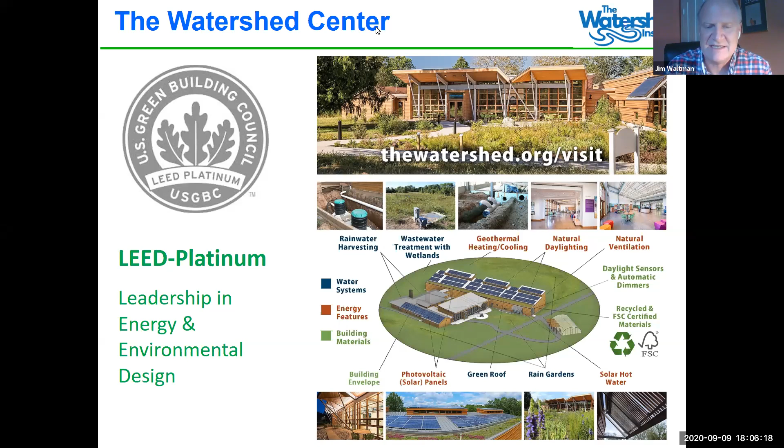It's also a great teaching platform for us as we work with municipalities and the private sector to improve stormwater management. We have a number of programs throughout the course of the year.

I just want to queue up a couple that are a little bit in the future. On February 4th and 5th, we'll be conducting our second annual Green Infrastructure Training and Certification program. This is designed for landscape professionals and public works staff, and it's a collaboration with a great group called the Chesapeake Bay Landscape Professionals. This is a program that just recently reached out to us in interest of expanding beyond their scope, which obviously has been the Chesapeake Bay.

And then later that month in February, we'll be providing a green infrastructure maintenance training program specifically for public works staff, and we'd love to have your town staff join us for that.

Of course, our staff would welcome other opportunities to come and present to your municipalities if you believe that would be of help. We're located near Pennington, Hopewell Township and Mercer County, and we tend to focus in that part of the state. ANJEC is a great partner that does work across the state of New Jersey, and I'm sure they would welcome opportunities to come speak to your municipal bodies as well.

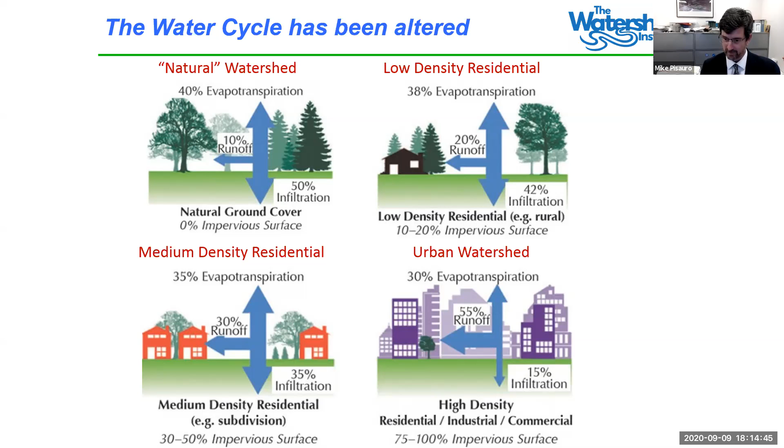Today, DEP just released with Rutgers a fairly regular land use change update, which indicated a little over 30% of New Jersey has urbanized, has urban cover, meaning that lower left-hand side scenario. So with 30% impervious surface, which varies depending on where you are in New Jersey, as a whole, 30% of water that hits the ground from rain events runs off, versus 10% under natural conditions. And again, that has some real world implications.

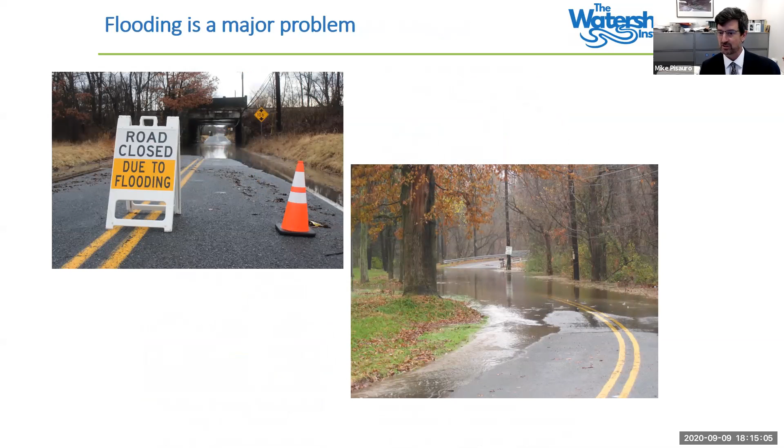Here are some of those real-world implications. These are two roads that I take sometimes to work. As Jim mentioned, we've all experienced flooding and impacts on our way to work. Here's two of them that I've personally had issues with, and here's a few others. These aren't the Irenes and Katrinas and Sandys of the world. These are not extreme weather events, just everyday rain events.

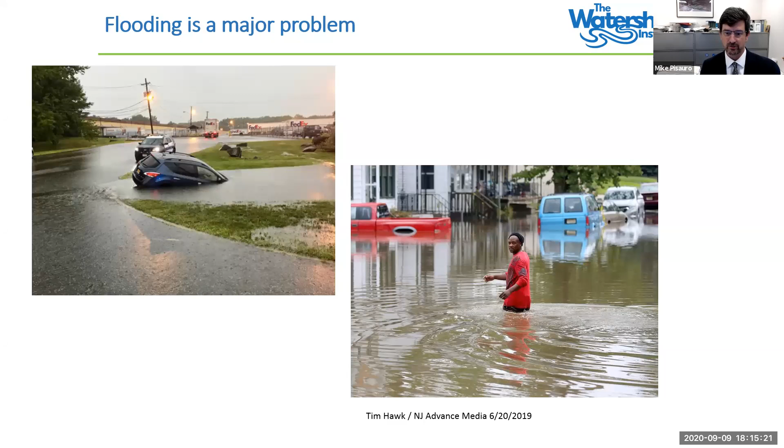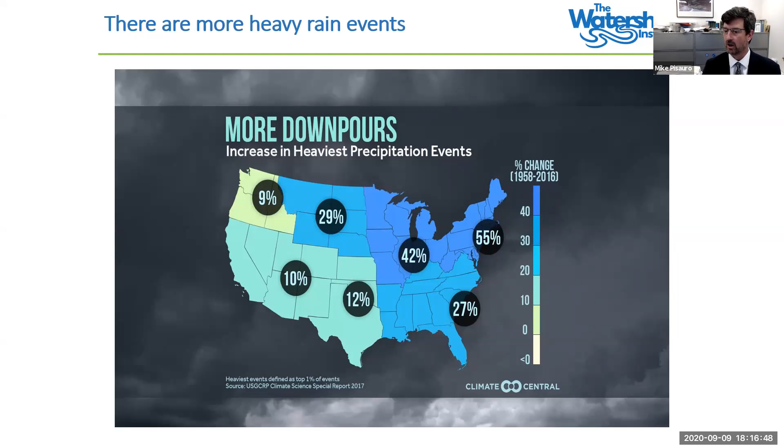At the same time as we're having more rain, the patterns of that rainfall have changed. In the Northeast, we are having more heavy precipitation events versus a long-term gentle rain that I remember as a child fondly, but more of it's coming down in a more intense period of time, which means our land cover and our systems have less opportunity to address it.

Not only are we having to deal with more rain, more volume, but that has real world implications for water quality. Every 2 years, the state of New Jersey comes out with a water quality report, required by federal law. This is the most recent one from 2016.

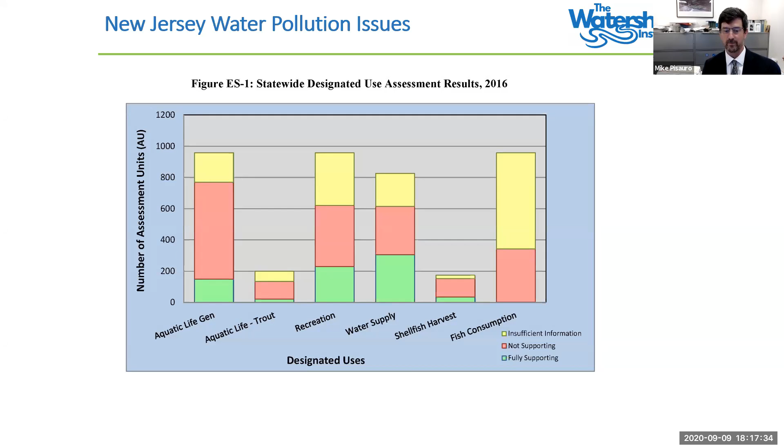Red is not good, and that red means we have water that is not meeting standards, that is not healthy enough for aquatic life, not healthy enough for recreation, not healthy enough for water supply. And this is 2016, and in case people think I've cherry-picked a report...

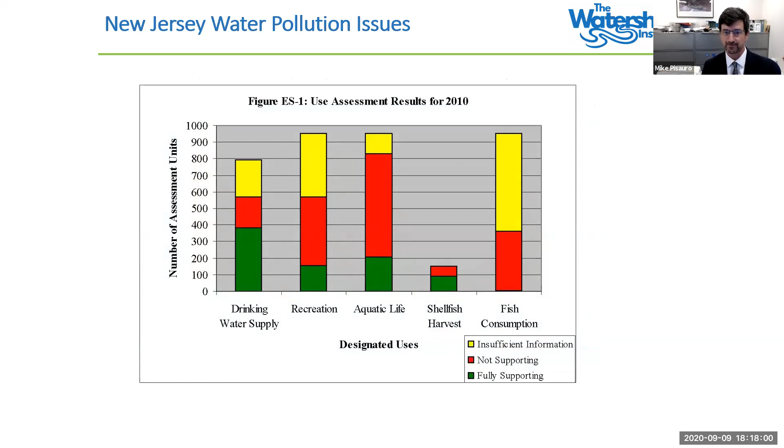2010, 6 years ago, a little different format, but generally the same result. And if I went back to 2006, 2004, we would generally have the same thing. Our modern stormwater rules came out in 2004, and we've been implementing them since. DEP has indicated in that 2016 report and the 2014 report that we are seeing declining water quality trends, and that has been, for the most part, because of urban runoff, because of how we, as a developed state, are addressing our stormwater management.

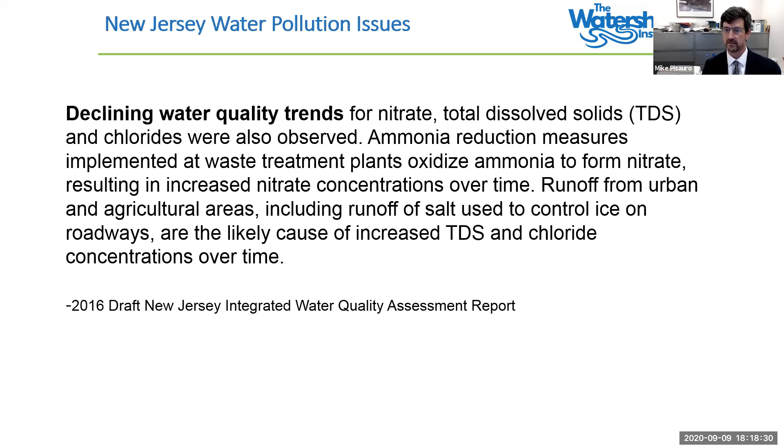According to the 2016 report, declining water quality trends of total dissolved solids, chlorides, and again from that same report, there's a correlation between our land development and our water quality.

So there are some real implications. As mentioned, our modern stormwater rules came out in 2004, and we updated them just in March, the Green Infrastructure Rule. But we're having this, and we're trending towards a report card of a C. And if that's, as I tell my kids, if that's the best you can do, that's great, but I know my kids can do better, and I think the state of New Jersey can do better, because the goal for water quality is not to become average, but actually to restore and enhance water quality so it returns to a natural condition. That's the goal we've had in New Jersey since the Water Pollution Control Act and the Federal Clean Water Act.

So that was a very quick run through of real world water quality implications. As Jim mentioned, we're all experiencing flooding. We can all point to roads and areas of our town that flood, and maybe didn't flood as a kid or only flooded during an extreme event, but now is becoming more and more prevalent.

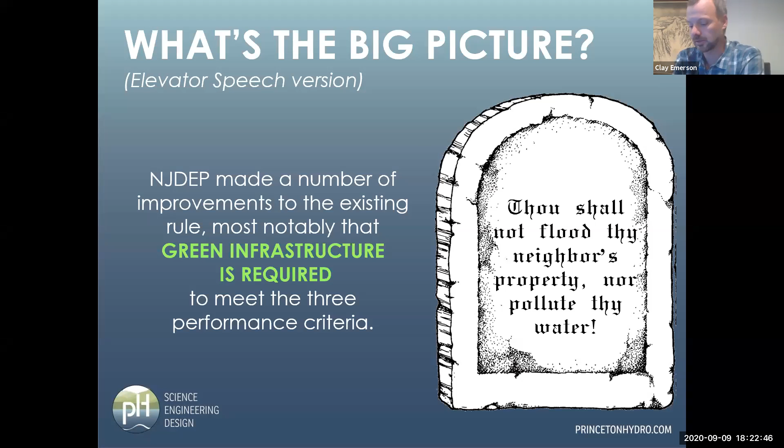I have to give them kudos for taking this on and going through a rather lengthy stakeholder process, getting input from the public—many of you probably participated in that. I think they really did an excellent job getting us to where we are now. So a very brief review: I'll go over some introduction stuff, then dive into some of the details that maybe you aren't as familiar with.

So again, starting with a little bit of the bigger picture, to try and keep things as interesting as possible: what is green infrastructure? Well, in our line of work, we look at it as more than just stormwater BMPs.

We're thinking about wetland creation, reconnecting floodplains, living shorelines—it's a new approach to design with a focus on natural processes. Nature is an amazing thing, and things have evolved to work a certain way, and if we can take advantage of those processes to our benefit, that's what we're looking to do. That's more my general definition of green infrastructure.

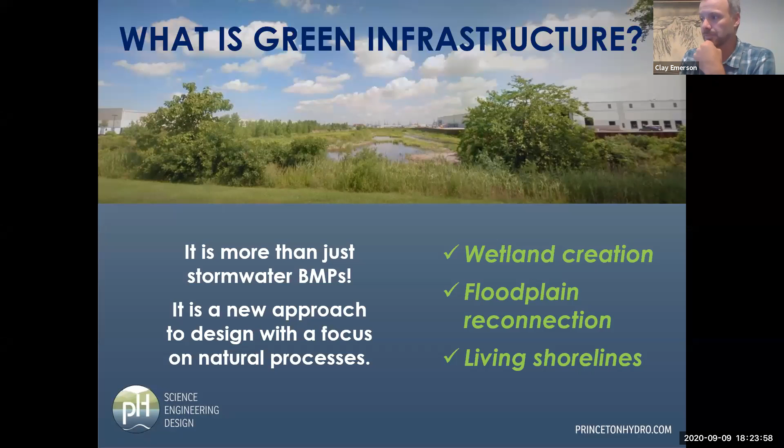Some of you may have seen this reference before in my presentations, to Design with Nature, by a local Philadelphia person, sort of a transplant I guess. These concepts we're talking about today were considered in the past, but in our slice of that blue marble pictured from the moon—here in the state of New Jersey—

one of the critical environmental problems we face is stormwater runoff, because we're at a point where we have a lot of infrastructure—Mike will talk about later—a built-up environment, and we have sensitive receiving waters that, of course, we all rely on for one thing or another.

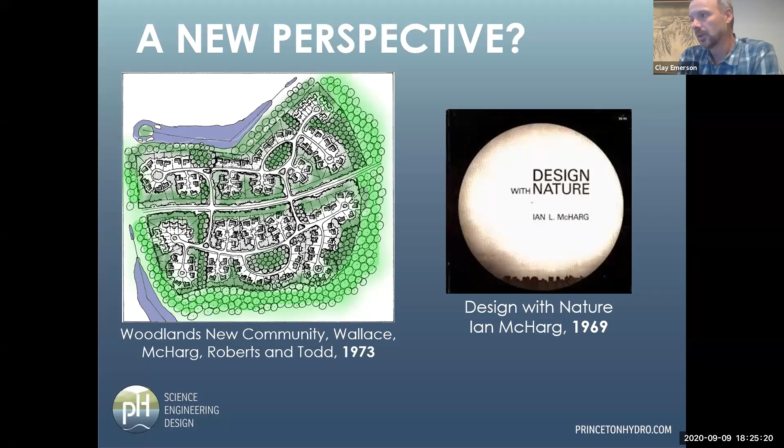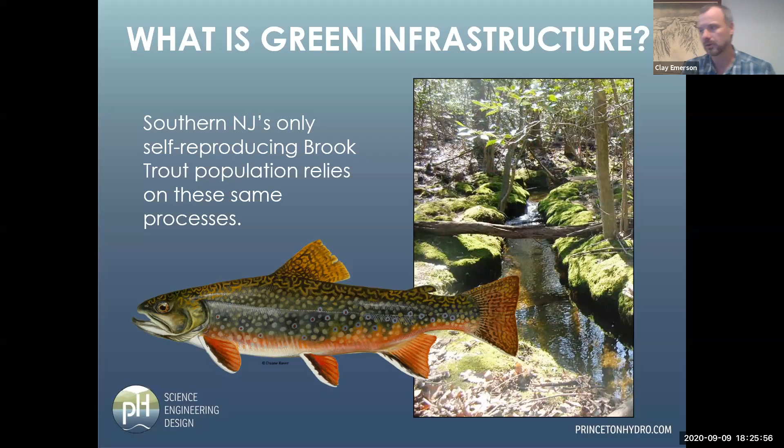It's a very unique watershed, and it has a lot of the processes we're going to talk about here today that, believe it or not, come back to this green infrastructure amended rule to thank for maintaining this really unique water quality in this very small tributary. So we'll connect those dots.

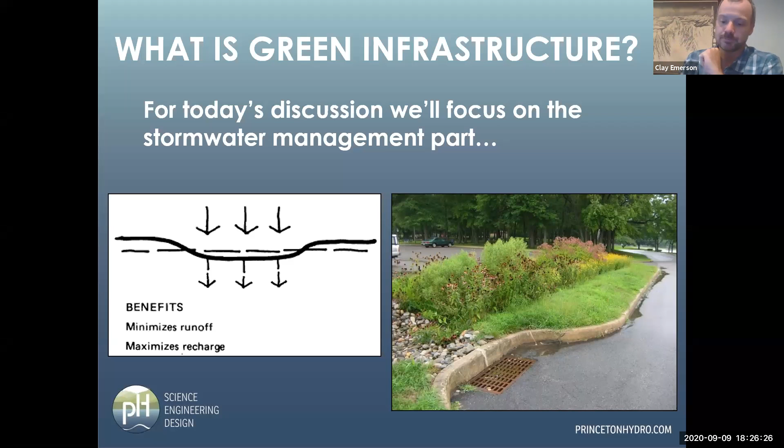You can have whatever definitions you want, but what matters here is that the state has their own definition, referenced directly from the amendment, the new rules. The definition of green infrastructure means a stormwater management measure that manages stormwater close to its source—we'll come back to that part of the definition—

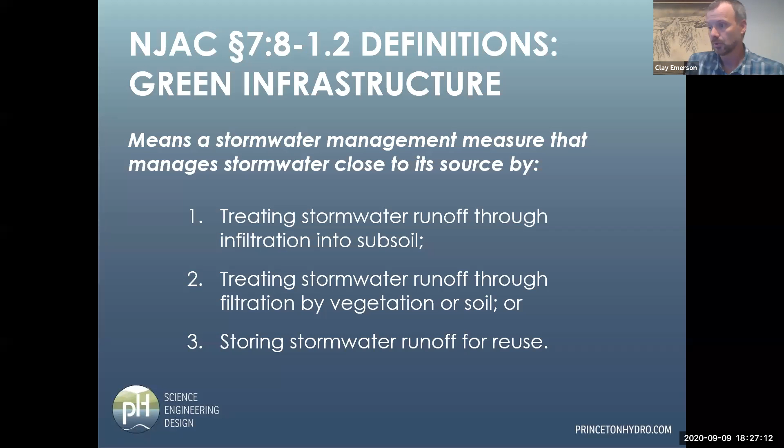by one or more of the following three things: treating stormwater runoff through infiltration into subsoil, or treating it through filtration by vegetation or soil—that is an 'or' in there—or storing stormwater runoff for later reuse.

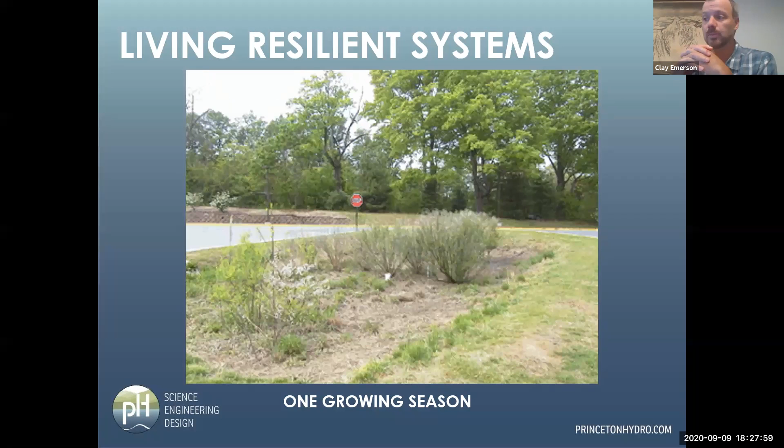I put this in here because many of these systems can really be living, resilient systems. If you see this kind of productivity above the ground surface in this shallow traffic island that was constructed, you can imagine all the things going on in the soil beneath that help keep this system working—without a lot, or in this case any, maintenance besides mowing once in the late winter.

Sometimes the best way to define things is to define what they're not. This is probably an all-too-familiar site: a typical detention basin with a concrete low flow channel, a retaining wall thing at the outfall. You can see the mandatory one inch of ponded water to provide habitat for mosquitoes, and there's nothing here that really screams water quality. So these things might be forced into extinction, at least as it applies to future development going forward.

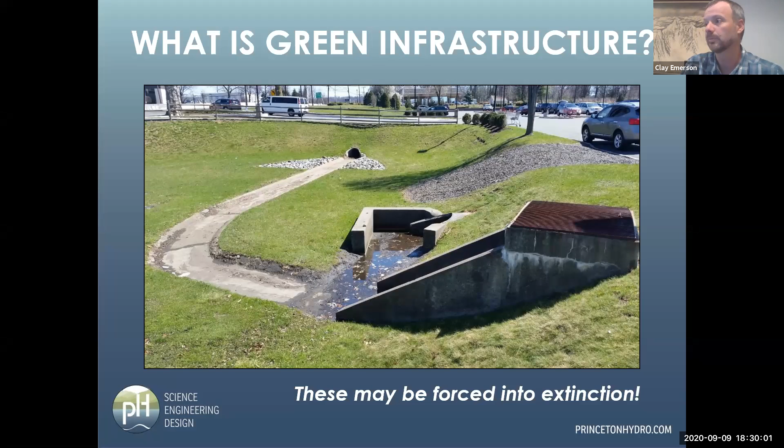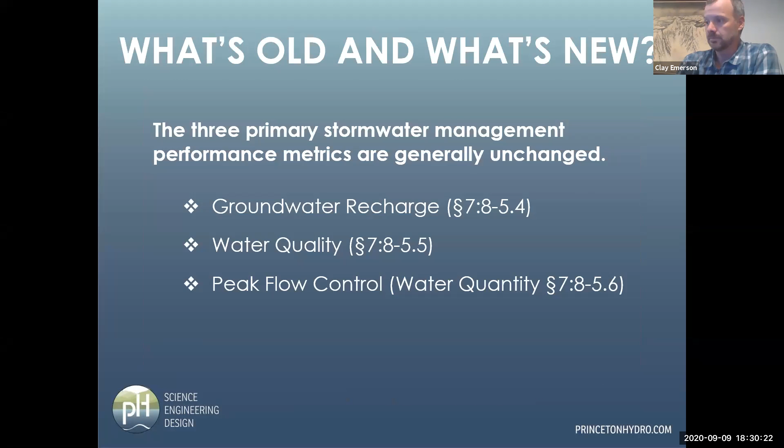So again, the three primary performance metrics are generally unchanged. As a quick refresher, we're talking about groundwater recharge, water quality, and peak flow control, or water quantity as it's referred to in New Jersey. Those performance metrics are unchanged. There's discussion about those—maybe that's something that will change in the future, but for now there are no changes there. That may seem surprising.

But the big change here is how these are met in practice—in other words, what needs to be done to demonstrate compliance—is different in, I would say, many cases, not necessarily all.

So this is the Cliffs Notes version here that you'll be getting. There's more information—I'll give you some links where you can find more. Many of you, if you've sought this out, you're on the ball and you're looking at things, and maybe some of this will be a review.

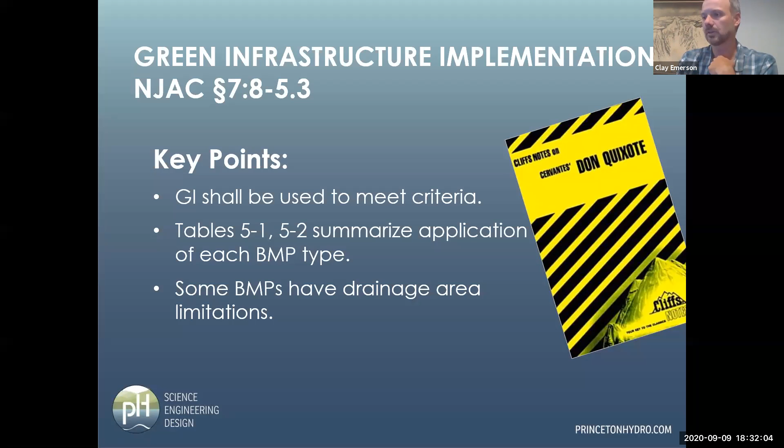But the key point here is that green infrastructure, GI, shall be used to meet the criteria. They published tables—specifically tables 5-1 and 5-2 primarily—which summarize how each BMP type can be applied. Some of these BMPs will now have drainage area limitations, which is a brand new thing. Another point I don't have a slide on: the amended rules' arrangement and ordering of the chapters has been totally shuffled, and that's a good thing. The new order the state placed them in is, I think, much clearer, easier, and more logical—that's another improvement they made. But if you're used to your sections, they're going to mix them up on you, so keep an eye out for that as you go through.

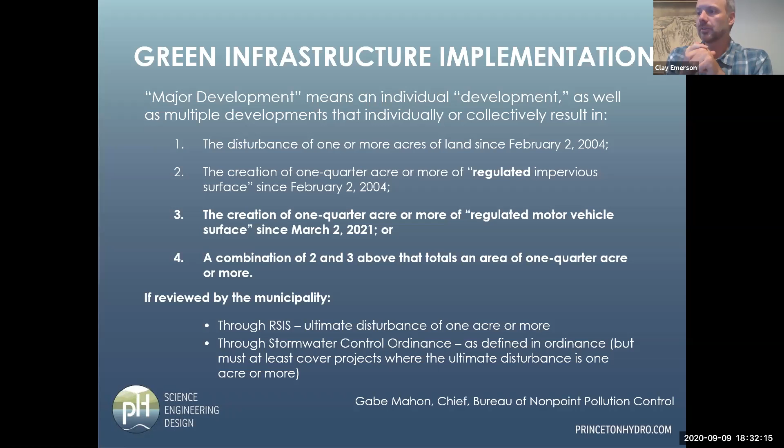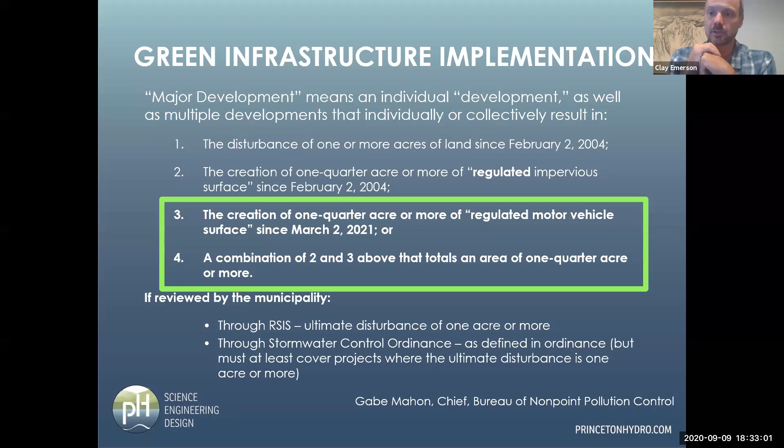In addition to the BMPs themselves, there are other changes that require discussion, and that is the definition of major development itself. Some of this is fairly new—they've added the dates, changed them since February 2nd, 2004. But items 3 and 4 here are new: the creation of a quarter acre or more of regulated motor vehicle surface, and then they have to put in a combination of 2 and 3 above. In other words, the take-home here is that the term major development—that regulated motor vehicle surface, which we haven't defined yet—is kind of treated the same as impervious cover in terms of the definition of a major development. So that is something to keep an eye on.

So these slides are a little busy, but I would be in trouble if I didn't include them. These are taken, more or less, with just some minor formatting, from the amended rules, and basically this is table 5-1. You'll probably get more familiar with this—these are the BMPs that can be used for recharge, water quantity, and water quality. You can go across this and pick your favorite one, the ones you'll see the most of. Small scale infiltration basins, for example, get 80% TSS removal, and they can be used for water quantity as well. Let's see if I can use this thing.

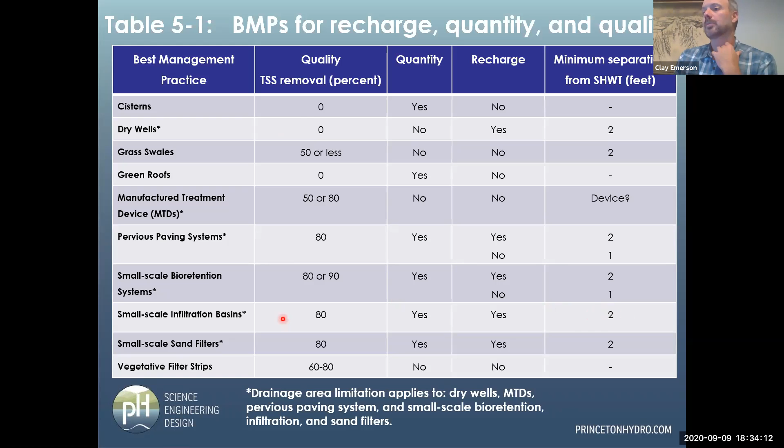And they can obviously be used for recharge, and they have to have a 2-foot minimum separation from seasonal high water table, a topic that I could go on and on about, but I'll try not to. And so a wide variety of different BMPs.

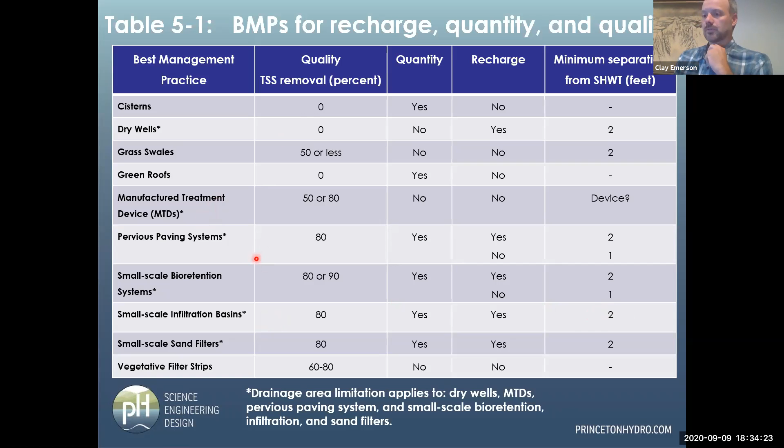Clay, if you could just very quickly explain what a BMP is. Oh, absolutely, I apologize. I can't stand it when people speak in acronyms that I don't know. So yeah, a BMP is just any stormwater management practice, something that an engineer is likely required to design, in this case, to support a land development application.

So things like dry wells, detention basins, although you don't see that on the list here, bioretention systems - these are all BMPs. Another acronym I have listed is manufactured treatment devices, MTDs, which are proprietary boxes typically placed underground that provide some kind of water quality treatment for stormwater runoff. I'll be mindful of my acronyms going forward.

Here, I've got two other ones. This is one, seasonal high water table, SHWT. Again, that's something that in New Jersey is really a pretty big issue.

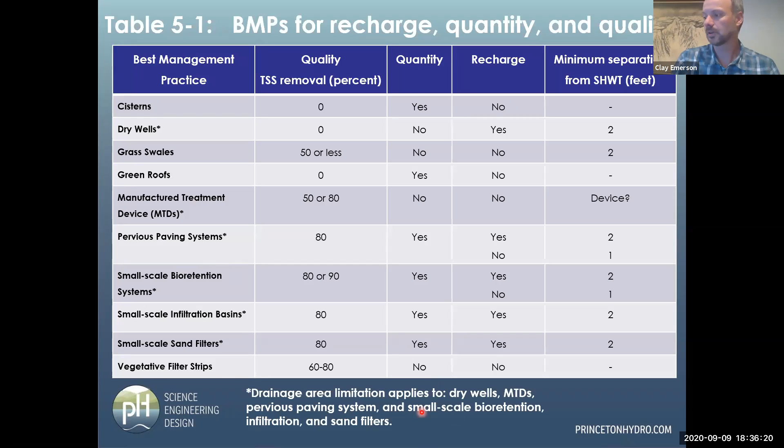If I may, I'm going to go back one slide. Some of these have asterisks, and I'll come back to that, but generally this is where those drainage area limitations come into play. So for systems like dry wells, again, the manufactured treatment devices, pervious pavement, and small scale bioretention and infiltration basins and sand filters. I'll come back to that point.

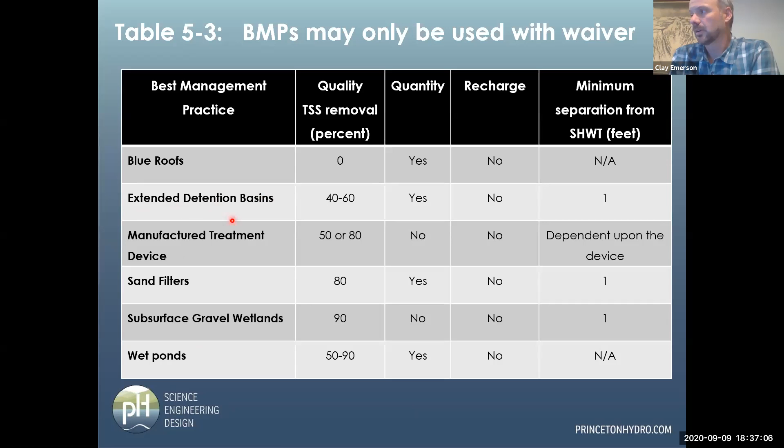And this is where our friend, the extended detention basin, lies. So again, this is new.

Drainage area limitations. So recall in the definition there was a statement that these are systems that manage stormwater close to its source. So the only way they could encourage or regulate that is to set these drainage area limitations. I'll have some examples that illustrate that later.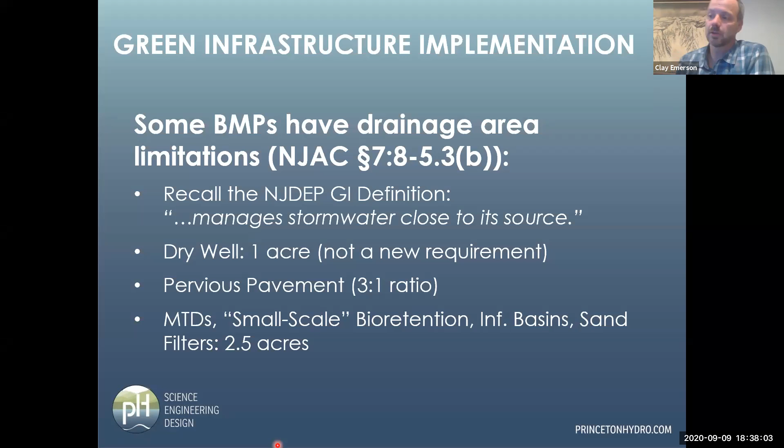Dry wells, maximum of 1 acre, that's actually existing, that's in the BMP manual, or was even before this. Pervious pavement, a 3-to-1 ratio, I'll explain that. And then these other systems, the drainage area limitation they finally arrived on was 2.5 acres. 1 acre was discussed for some time during the stakeholder process, but it's 2.5 in the amended rules.

Very quickly on the pervious pavement, you'll see some places where it's applied in this close-up view. Standard asphalt in the high traffic and truck loading areas. In this case, porous concrete in the parking stalls, and they're just saying you shouldn't have more than 3 square feet per square foot of pervious pavement. I like the loading ratio approach - it's what's done on the other side of the river in Pennsylvania, but we have the drainage area limitations here to work with.

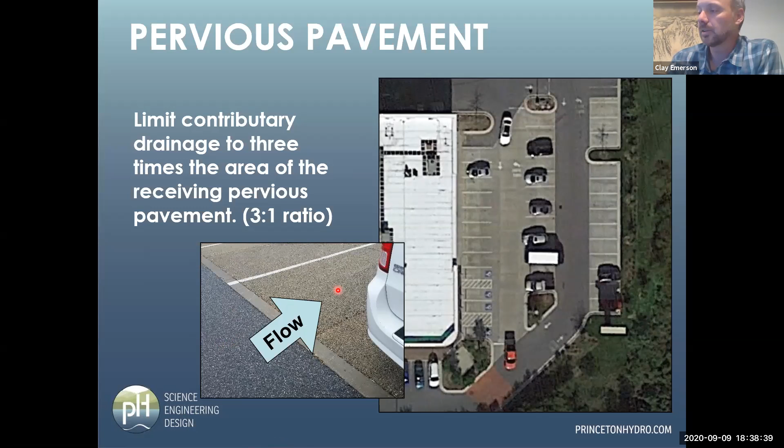So again, 2.5 acres. Obviously, if your site is smaller than 2.5 acres, this isn't something that is going to change the layout of your stormwater management, or it's not going to influence the application you might be receiving at your municipality.

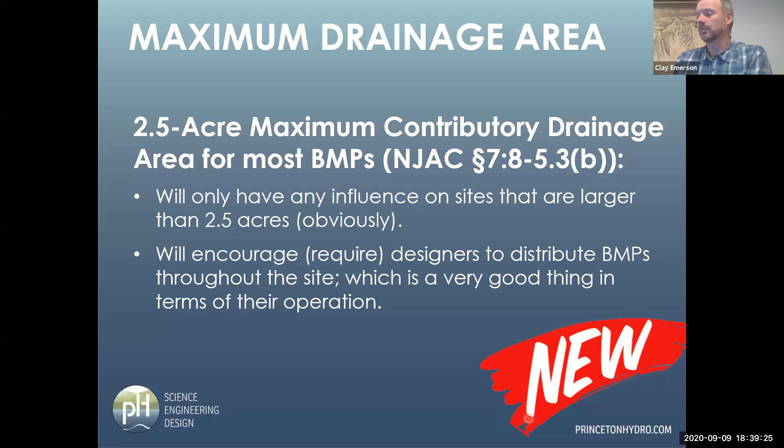And I say it will encourage, but really require designers - DEP doesn't encourage anyone to do anything, right? They write requirements. So this will force designers and engineers to distribute these BMPs throughout the site, which is a good thing, and that's one of the reasons they did this. In terms of their operation, they're going to function a lot better.

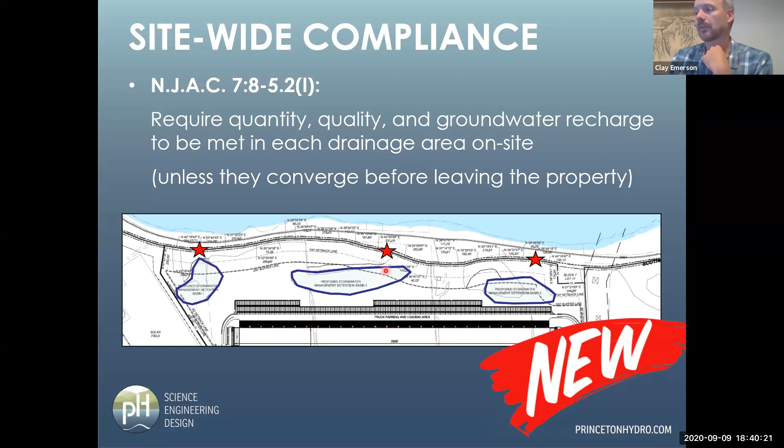One clarification the amended rules made is that these 3 primary performance criteria must be met in each drainage area. So if you have a large site, or one up in headwater areas where parts of the site drain in different ways, they've made clear that before, people would do some averaging, like letting one side of the site go. Now it needs to be met at each discharge point. Maybe this isn't the best example, but even if these aren't really different tributaries it's discharging to, it needs to be met at each location. This is a huge warehouse site we're seeing a lot of in the state, so it would have to be demonstrated at each point.

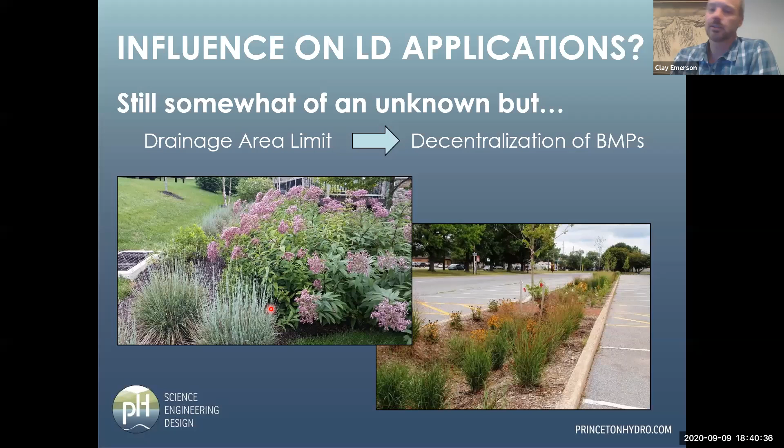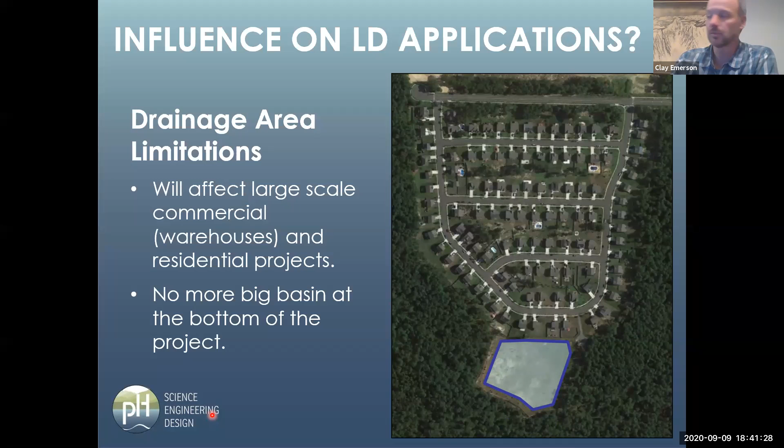Here's a relatively recent post-2004 application that will not look like this in the future: a fairly large infiltration/detention basin at the low point. This is the easy thing, what engineers are used to doing, but it's got a 30-acre drainage area, so that's not going to fly anymore. This is the typical approach, and I'd say, no more big basin at the bottom of the hill, the bottom of the project. For large residential projects and the warehouse industry that's booming right now, this is going to make changes in those applications, and changes for the better in terms of receiving water bodies.

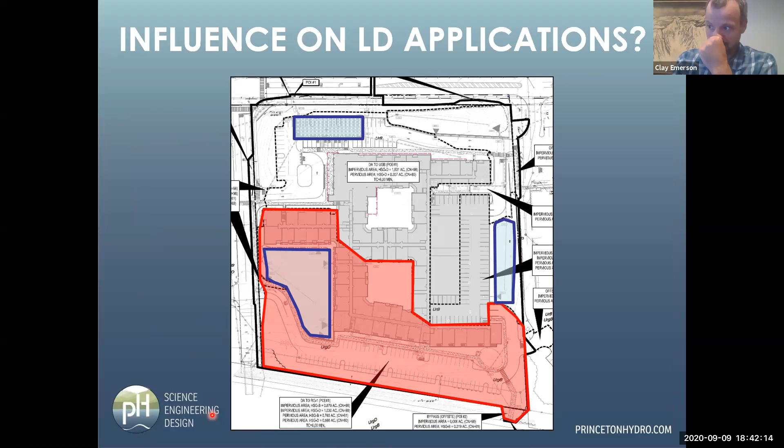Another example of what this might mean: this is a mixed use commercial residential application with a rain garden that's actually quite big, a third of an acre, but they have technically over 3 acres draining to it. While that basin is, in my opinion, plenty big for that drainage area - that red area is the drainage area to the blue area labeled 0.33 - that would exceed what these rules put into place. So this would have to be broken up into 2 separate systems to keep the drainage area below that 2.5 acre threshold. It wouldn't change visually what you see too much, but even this wouldn't quite comply.

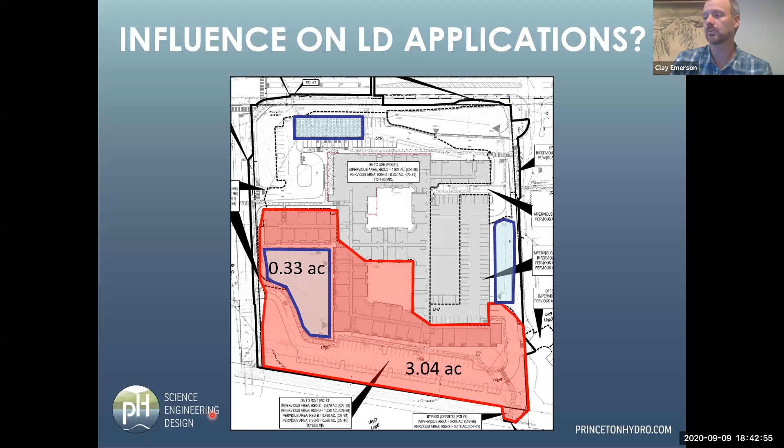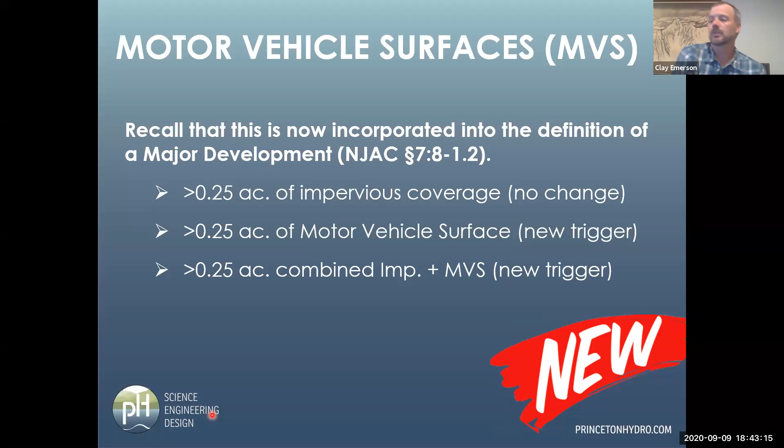The motor vehicle surfaces, I said we'd come back to that - maybe this is an acronym we'll start to see now, MVS. This is a new part of the major development definition, so you can think of it as a new trigger for that definition to kick in. There's a definition for it, of course, and it basically is what you'd expect: intended to be used by motor vehicles and/or aircraft, and directly exposed to precipitation. So this wouldn't apply to lower levels of a parking deck or something, but includes, not limited to, driveways, parking areas, parking garages being the top parking deck, roads, racetracks, and runways.

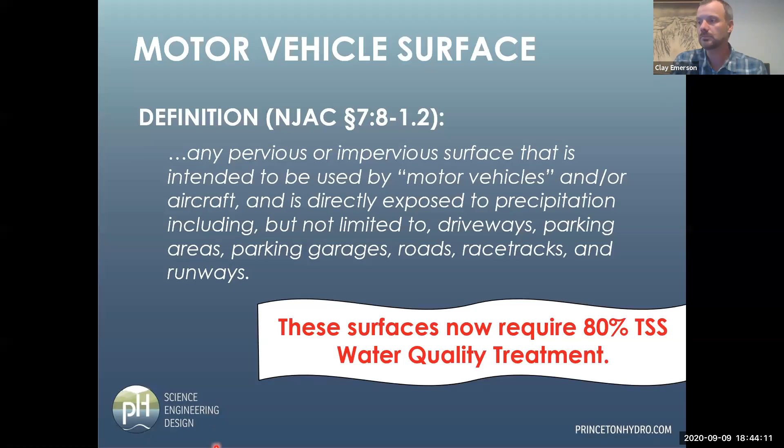These surfaces now require 80% TSS water quality treatment. Not everything fit into that before, and this is a change. Again, you have to look at what's not necessarily included in this as well - what this rules in and what it rules out. Standard pavement, drive, and parking areas - yes, that was always the case, always requiring 80% TSS for water quality compliance. Gravel and dirt drive and parking areas - that was kind of a gray area before, it won't be so gray anymore, that's a definite yes, definitely meets the definition for a motor vehicle surface. Rooftops, which are hopefully impervious, or green like at the Watershed Institute - no, and that wasn't really enforced anyway in my experience. Same thing with sidewalks or other ground level non-vehicular areas, like perhaps this plaza here in New Jersey - as I read the definitions, no, that would not require water quality control, though maybe it did before. Strict reading and interpretation - I've bounced this slide off DEP before. So there are some things it brings in and some things it brings out.

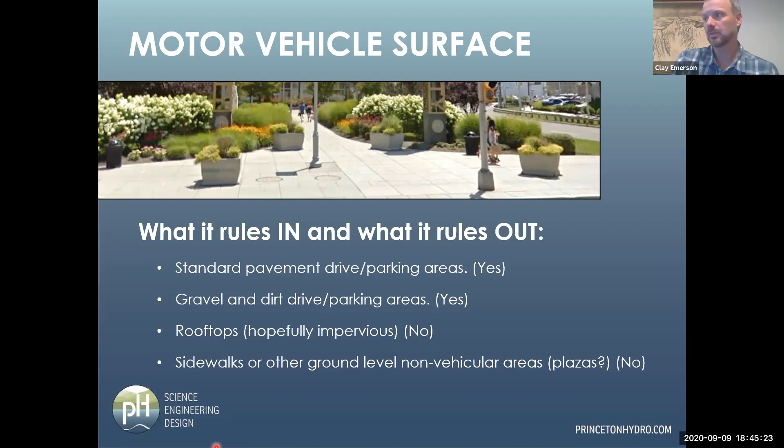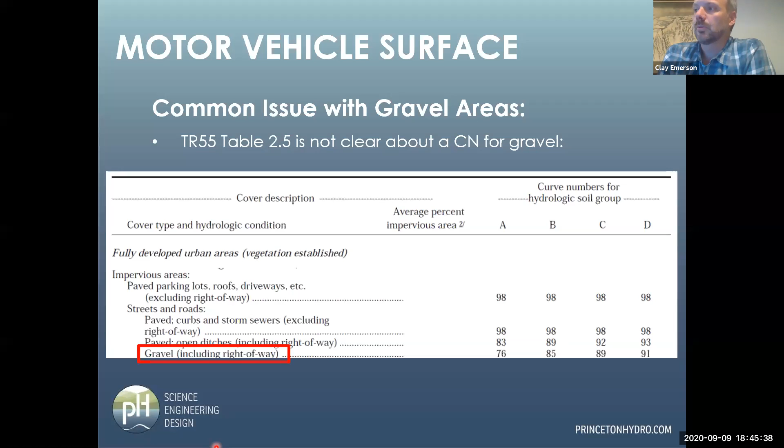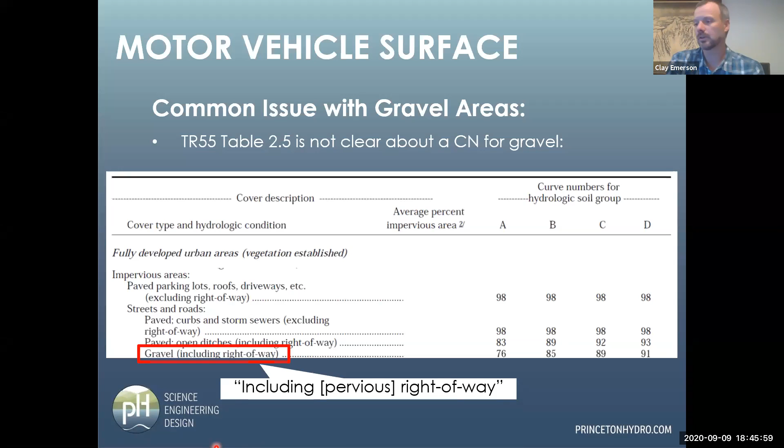One quick note for folks from environmental commissions and municipalities about motor vehicle surfaces. When people include gravel parking areas, we often see them misrepresented in stormwater management reports. They should not be using these numbers directly from the TR55 tables, which is what engineers use to design these BMPs.

They should really be using a curve number of 96 or 98, typically 98, to represent the runoff characteristics from standard pavement. This is now in the draft Chapter 5 BMP manual, which I'll talk about later, and it's also coming straight from NRCS discussions we've had personally. It's also kind of common sense, but anyway, the first two seem to carry more weight.

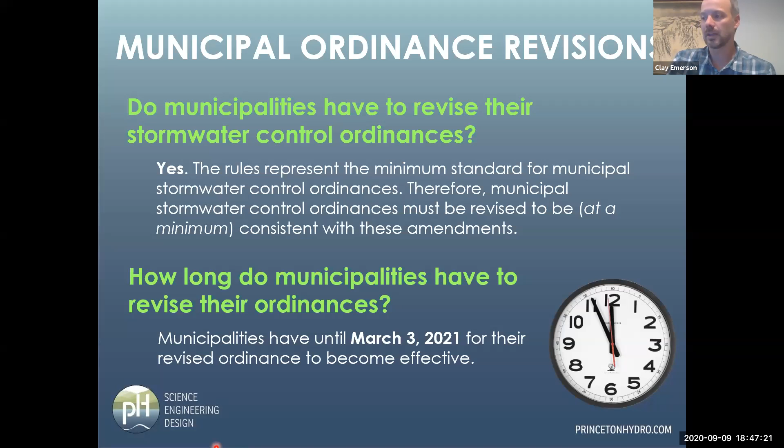Municipal ordinance revisions - that's what a lot of you are perhaps working on now or starting to seriously consider. Do you have to revise your stormwater control ordinance? Short answer is yes, the rules represent the minimum standard, and they must be revised at a minimum to be consistent with these amendments. The clock is ticking - we're in the 5 minutes of the 11th hour, but it's not that late. But as Jennifer said, time is flying, and that's not so far away - March 3rd, 2021.

But don't worry, there's lots of good guidance out there. You can talk to Mike Pisauro and the folks at the Watershed Institute - they have resources they're working on. The state, as of March, has put up Appendix D, a new model stormwater control ordinance that gives you a huge head start, the ability to do things like lower the threshold requiring stormwater management. We've had some interest from municipalities about that, and perhaps increase the TSS requirement - there are other municipalities in the state that do that as well.

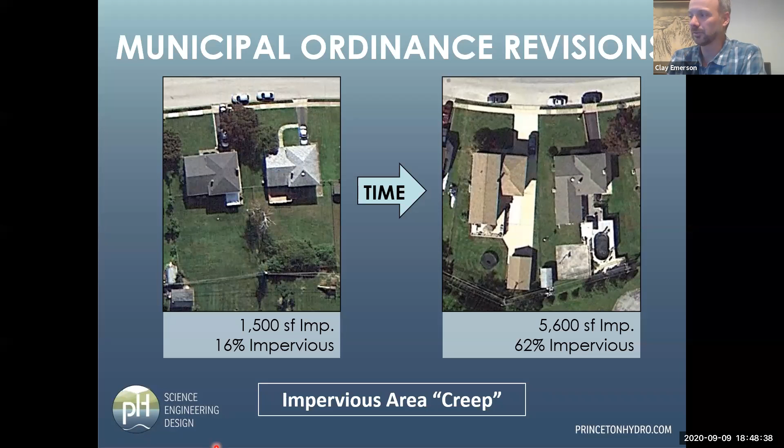About that threshold - you can see the building footprints in this neighborhood all looked like the ones on the left when they were built. If you go through this neighborhood in Google Earth and do a tour, you'll find many that were drastically improved, going from something that was 16% impervious to 62%. None of this is really being captured in probably most, with the exception of what Mike here is going to talk about, current ordinances.

There are some BMP manual revisions, and I'm going to wrap this up here with the last couple slides. They're still technically out for public comment - they were looking for these earlier, chapter 5 and 12. There's the link there - just search New Jersey BMP manual and you'll get links to all these new sections on the state site.

There's also chapter 13, groundwater table hydraulic impact assessment for infiltration BMPs, which has been accepted. This is going to become a bigger deal with the revised rules. What I'm talking about here is that a lot of those green infrastructure systems that are going to be accepted rely on infiltration to function.

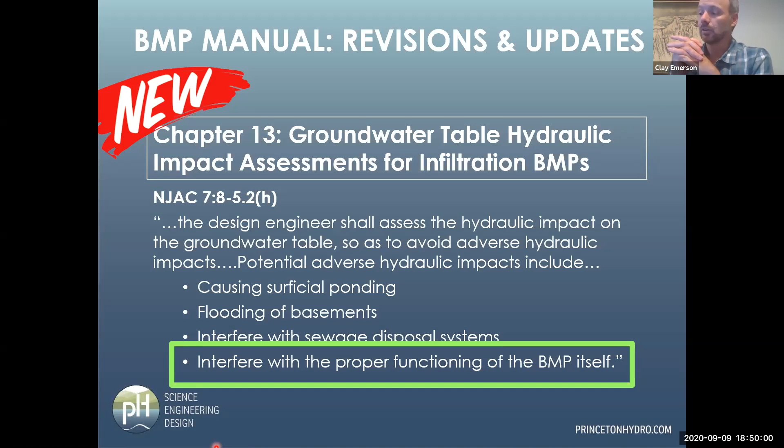There's a whole guidance document that the state has prepared through a stakeholder process to make sure those are being designed in a way that won't lead to either premature failure or them not operating like they're supposed to from day one. And that's what I was talking about - the importance of seasonal high water table, something I could talk to you more about if time permitted.

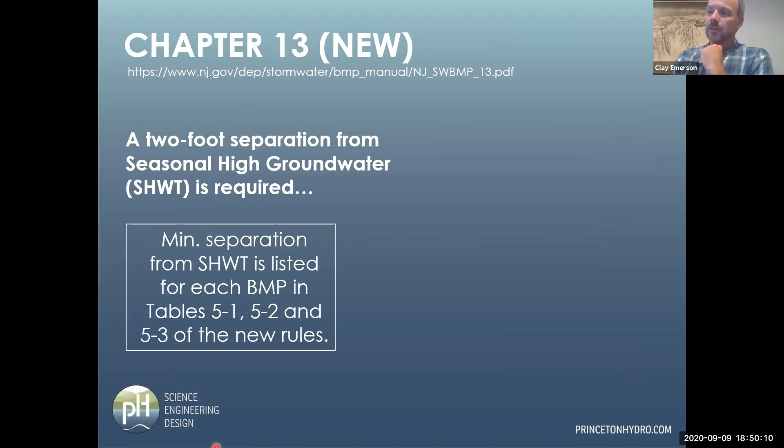But the gist of it is we've all heard this 2-foot separation from seasonal high groundwater is required, and the big stop sign here is that that doesn't necessarily mean it will work. In tables 5-1, 2, and 3 of the new rules, they list the separation, but again that is not the green light that means the system will function. I think that's something that hasn't always been understood.

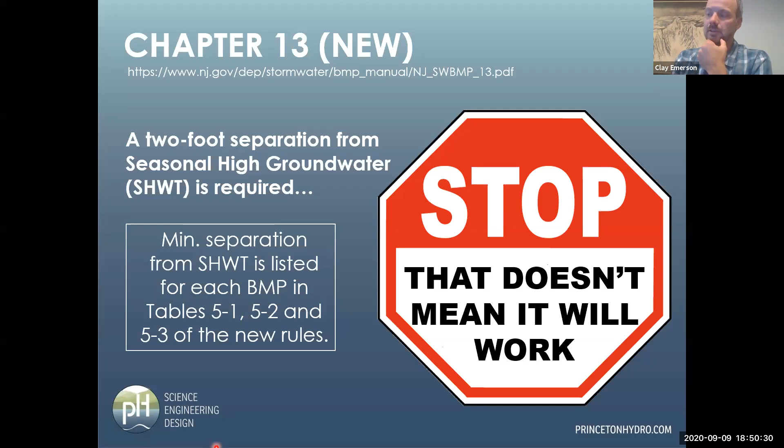So that was a little bit of a whirlwind tour there. I know we're doing Q&A at the end, and Mike has been gathering those up. But with that, my email address is here, and I thank you for your time and attention. Hopefully there was some new information there for you. With that, I will turn it back over to Mike, who will take it from there.

You need to unmute, Mike. David, I think that's the first time anyone actually wanted to hear what I said. Clay, thank you very much for that presentation.

I keep learning stuff every time we go through this. One of the things I want to point out from a couple of questions - yes, there is starting to be a huge push of development and redevelopment throughout this state. But until the municipality adopts a new ordinance, and hopefully an enhanced ordinance, none of what Clay just spoke about or what I'm going to speak about applies. The old rules still apply. So that's one of the reasons why it's so important to get going and get moving so we can actually start to see some improvements.

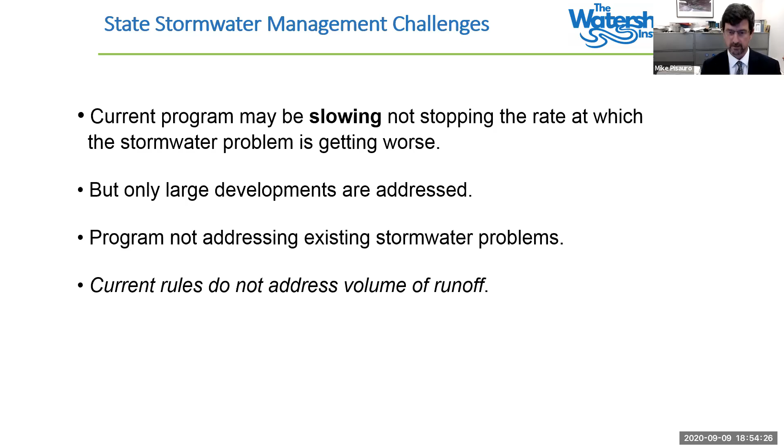One of the big things I want to get out, because this is an issue: can municipalities be stronger? Can they adopt a stormwater ordinance that is stronger? I think the answer is clearly yes, though I'll caveat that a bit. As Clay mentioned, there's a model ordinance DEP put out—it's on their website, Appendix D. I've highlighted in blue the important parts. Unlike Clay, I'm very word-focused, not pictures, so my slides have a lot of words.

Water pollution laws allow municipalities to take additional actions. The MS4 permit, which authorizes municipalities to collect, discharge, and treat stormwater, specifically allows for stronger stormwater ordinances. The model ordinance itself says, in this language, municipalities may choose to do stronger and additional measures. I think it's good practice for a municipality, when adopting these stronger protections, to explain in their resolution or ordinance why they're going above and beyond.

One of the biggest hurdles is something called the Residential Site Improvement Standards, RSIS, which is used as a cudgel. It's deemed, at least for residential development, not to allow for stronger protections. I think that's false. The RSIS statute itself specifically allows for stronger protections where there's a gain to protection of public health and safety. I think that's quite clear, but there is some uncertainty in it.

So one recommendation, and this is what Princeton is going to be doing, is adopting these enhancements not only as part of their stormwater ordinance but also incorporating them into their zoning ordinance, because municipalities have the absolute ability to zone and put those standards into the zoning ordinance. That's a way to address concerns that RSIS may impact, since RSIS only applies to residential development.

And stormwater doesn't care—pollution doesn't care where it's coming from. It's coming off a lawn where you've put pesticides on, or from a house, or from a corporate campus lawn. Doesn't matter, it's still pollution, still runoff. That's an issue. But again, since our stormwater management rules are water pollution laws, it should be clear that you can go stronger. You should probably just take a few steps to explain why, and add those protections into your zoning code as well.

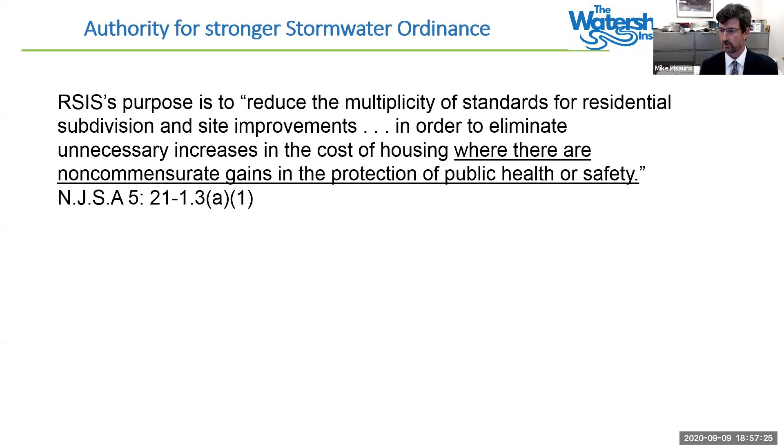So what are those enhancements we've been talking about? They generally fall into a couple of categories: redefine what is a major development, since New Jersey stormwater rules only apply to large developments; address smaller developments; address redevelopment. So what I've been calling the sins of the past, before we even knew they were sins—developments that went in during the 40s, 50s, 60s, and even the 70s had no stormwater management. If they get redeveloped, they by and large still don't get meaningful stormwater management going forward, and we need to fix that.

Capture and treat stormwater on site. Enhance our analysis of what we are doing and how our systems are going to work. And then have a reporting requirement for municipalities so they understand what's going on in the town.

I'm going to go into a lot more detail on all these, but this is just a broad outline of the categories of enhancements. We do have a model enhanced ordinance on our website, and I will link to it at the end of this presentation, as well as DEP's model ordinance.

So I mentioned changing the triggers for major development. Right now, major development is defined as an acre of soil disturbance and a quarter acre of new impervious. We should be reducing those to a half acre soil disturbance and 5,000 square feet of impervious cover. That would capture more developments so that you are getting the full level of stormwater management.

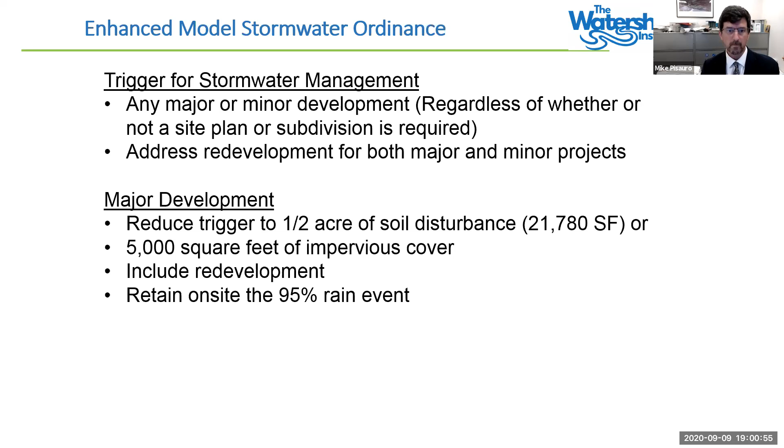Minor development: you'll have a lot of instances where even with the reduced major development threshold, that half acre soil disturbance or 5,000 square feet of impervious cover, you're not going to trigger that. But you're still contributing to stormwater runoff, still contributing a pollution load to your receiving body, to the stormwater system the municipality has. So we're trying to address that.

What we did is craft a very simple mechanism to figure out what you have to do. For every 250 square feet of impervious surface, you have to start treating 2 gallons per square foot. So that 250 square foot addition, or a 3,000 square foot home which wouldn't trigger major development, would still have to help address the problem and reduce the pollution loading to your local water bodies. That 250 square foot addition would have to treat 500 gallons of stormwater—basically a 2-year storm, about 3.3 inches of rain.

Again, an on-site retention standard tries to keep the water from leaving so you're not flooding out your neighbor, not contributing to a volume downstream, because everybody is downstream. At some point, downstream will flood, and we're trying to minimize and eliminate that.

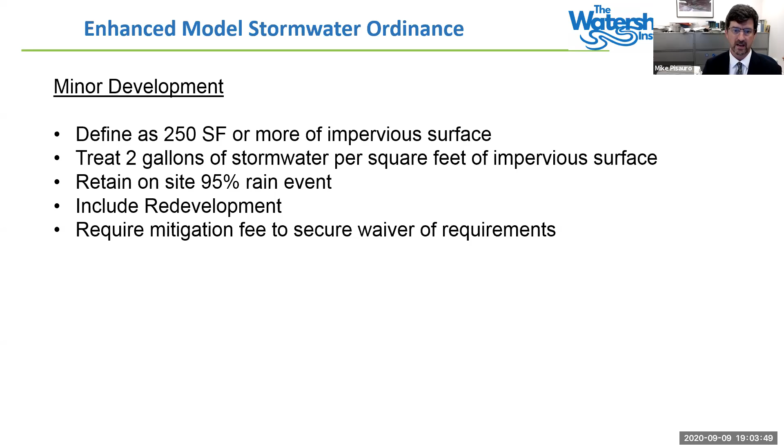Here's just a couple examples of minor developments throughout the state. There are probably about 2 or 3 dozen towns that have a minor development ordinance, ranging somewhere from 200 square feet of new impervious surface. Princeton has 400 square feet - I couldn't get them to go to 250 square feet, but that's okay - to about 1,000 square feet of new impervious surface. So here's sort of the triggers throughout the state for minor development. This is not something we created, but has been going on throughout the state.

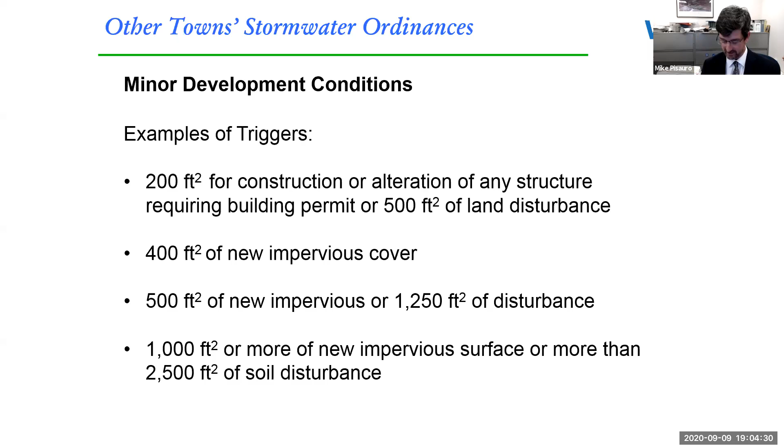Once you've triggered that, there are various levels of treatment. You have to infiltrate 3 inches of runoff per square foot. A lot of towns have that, and that 3 inches is just about that 2-year storm, or that 2 gallons per square foot that we're recommending. Cranford has a sliding scale. Princeton, again, has that 2 gallons per square foot of impervious cover to treat, and treat it with green infrastructure.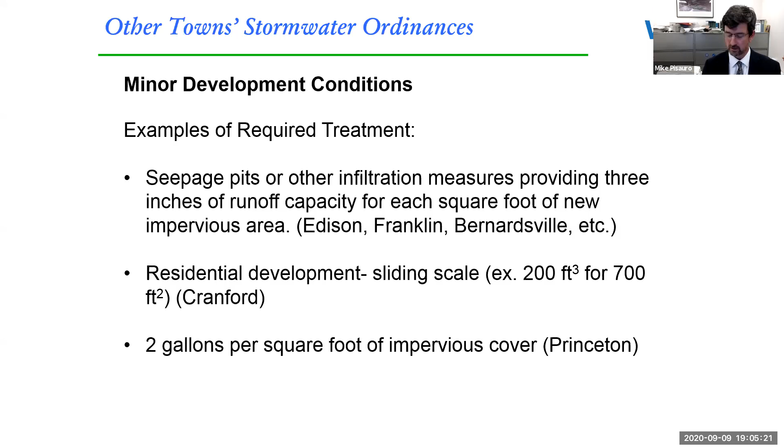As I mentioned, we try to create a system where you didn't have to, no offense Clay, hire an engineer to figure out what you have to do if you're putting on a sunroom or an addition to your home, or building a modest home that doesn't trigger major development. We wanted a way you can take a look, figure out what you had to do with your architect or your landscape architect, and really incorporate it.

I'm going to skip ahead one second. There's a lot of charts out there, a lot of material out there on how to do green infrastructure, how to do rain gardens. Here's an example from Rutgers Water Resources Program to give you an idea: I have 500 square feet of impervious surface, I may need a 200 square foot rain garden, depending on your soils.

I also look at this - if you're doing an addition or new construction, you're going to have landscaping. So have that landscaping incorporate stormwater management, so it's doing double duty. It's providing an aesthetic value to your property as well as handling your stormwater. Very few people do an addition or new construction and don't do landscaping. So that's another aspect that we thought would be very useful, and not an additional obligation on a landowner that they weren't going to undertake anyway.

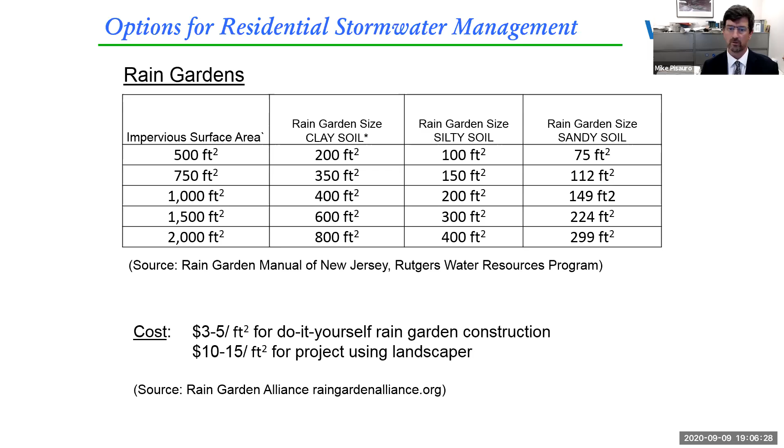I mentioned there's going to be some circumstances - and I want to stress this waiver fee we're advocating is only possible for minor developments, there's a whole other set of requirements for major development - but there's going to be circumstances where there's no room for green infrastructure. You have contaminated soils, you may not want to do that. Or in order to do green infrastructure you have to cut down trees, which may not be a benefit, because trees are a stormwater management benefit. There is one site where a property owner was talking about doing green infrastructure; the place to do it logically on their property, because of the way things flow, was in the floodplain of a stream that floods very regularly. Again, not probably the best way to do it.

So having a mechanism where the property owner can say it doesn't make sense to do green infrastructure on my site, or I can't do all of that requirement, to pay a fee to the municipality, which the municipality can then use to do improvements elsewhere to compensate - but to provide a level of flexibility to the homeowner, to the property owner, and yet still have stormwater management happen.

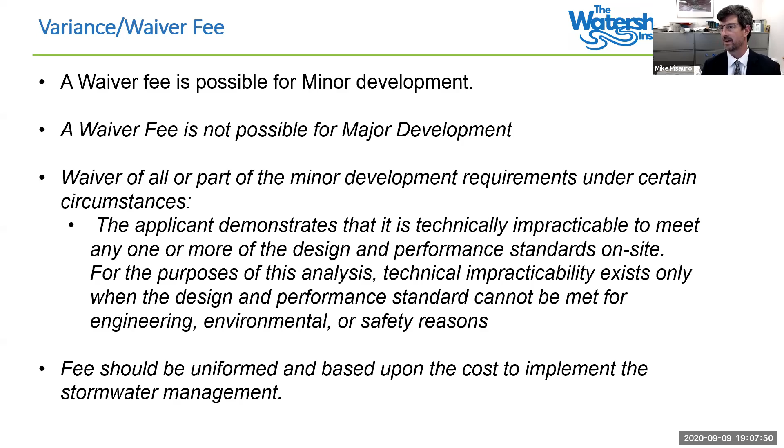The other thing we put in our model ordinance is enhancing the analysis that developers have to do when they come for major development to a planning board or zoning board. What are the environmental features on site or adjacent? Are we talking about forests? Are we talking about core forests? Because as you start to lose core forests - I wish I didn't have a hard time saying that today - you start to invite invasive species, which is a problem. And forests are a carbon sink, climate change, and stormwater benefit. So you want to maintain your forests.

Taking a look at how you're rerouting stormwater throughout your site so that you have a wetland, and the rules say you should stay mostly away from wetlands. But if your site is regraded and you're draining all the stormwater away from that wetland, what is that long-term impact to that wetland?

Are you starving it, and it will no longer be a wetland in a few years? So taking a look at that and having an analysis so the developer or applicant can show that wetland will survive and still provide stormwater benefits, because wetlands are a great benefit for stormwater management. They provide flood buffering, filter out pollutants, provide habitat and flood storage. So we want to keep that.

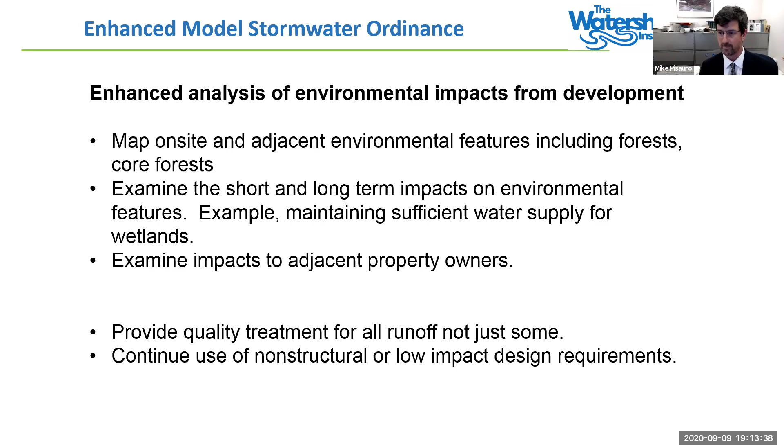As I mentioned, most of our waterways don't meet standard. I showed the two slides from DEP's water quality reports showing impacts. What DEP does, under federal law, is come up with what's called a total maximum daily load, which is a pollution budget — how much pollution can go into a waterway and still meet standards. That pollution budget will show you have to reduce your current allowance because we are now over that budget.

They allocate that budget to various sources — wastewater treatment plants, urban stormwater management, agriculture, etc. What doesn't happen is taking that budget allocation and incorporating it into your stormwater management. So your stormwater management is exactly the same for a development going to an unimpaired waterway as it is to an impaired waterway. If you have a waterway that already has too much sediment in it, your stormwater management doesn't change.

Other states do that. They require better stormwater management. They require municipalities to look at how to reduce the existing load. And we think that should be incorporated in stormwater analysis, and municipalities do.

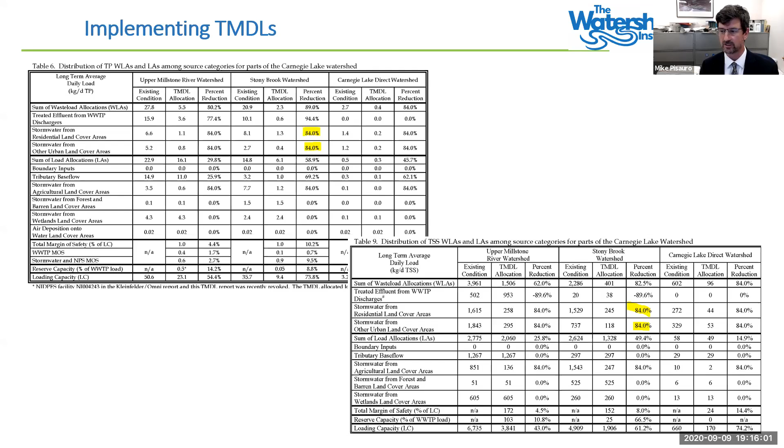So what stormwater management rules do is allow an increase of pollution into that waterway. It's an increase by 20%, but it's still an increase. It's not a reduction. So taking a look and incorporating an enhanced stormwater management into these water bodies that have already been burdened, I think that would make sense. And I think that is actually required by the Clean Water Act and the law.

Then a reporting requirement. So all stormwater management, and this has been in existence since 2004, has to be maintained.

That is probably one of the bigger omissions for most property owners. In 2018, DEP released a new permit for the municipalities, which authorized them to collect and treat stormwater, to review stormwater management plans and approve them for development. And at the end of each year, municipalities have to report back to DEP that all of their publicly and privately owned stormwater management systems are being maintained and are operational.

What we've recommended to municipalities is to have an annual stormwater permit. So all responsible parties, all parties that have a stormwater management system on their property, get a permit. They have to submit reports to the municipality that these things are being maintained, and that municipality has the opportunity to go out and audit those reports to make sure that's in fact happening.

We've recommended a fee, mostly because it helps the municipality defray the cost of implementing the program and complying with their permit. And again, I don't look at this as necessarily a new requirement for the municipality. I look at this as a mechanism to help them comply with what they have to comply with, and hopefully help improve stormwater management so they identify sites that aren't working and go back and fix that.

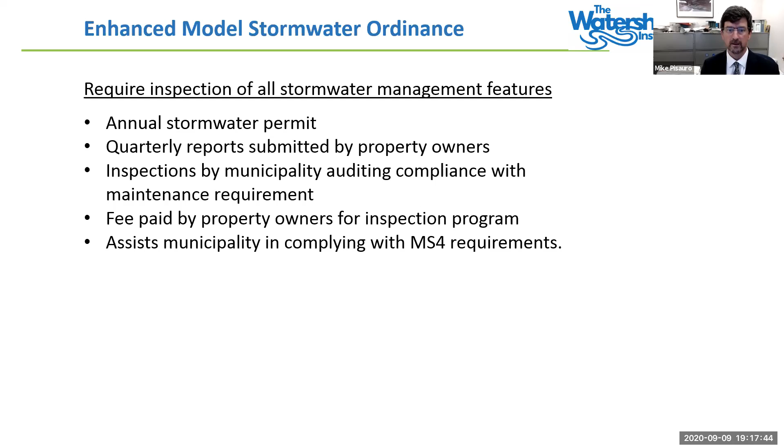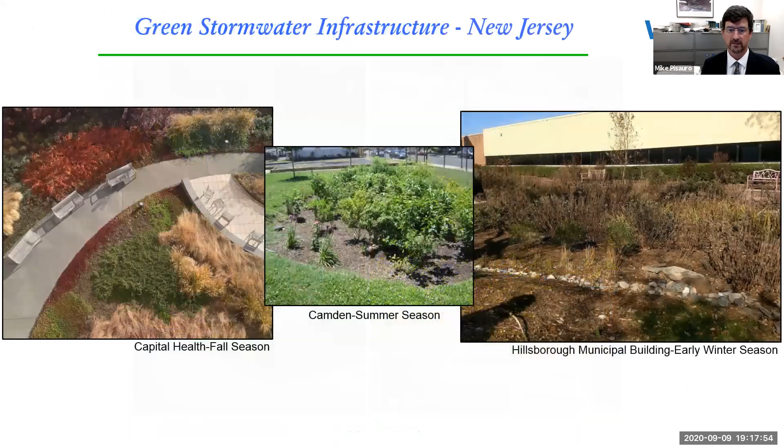And then I have a bunch of examples of green infrastructure, so we have a sense of what it is. But what I'm going to do is hand this off to David to talk about Princeton's experience with the enhancements that they did in 2017 and what they're going through at this point. So I'm going to stop sharing, David, and you are up.

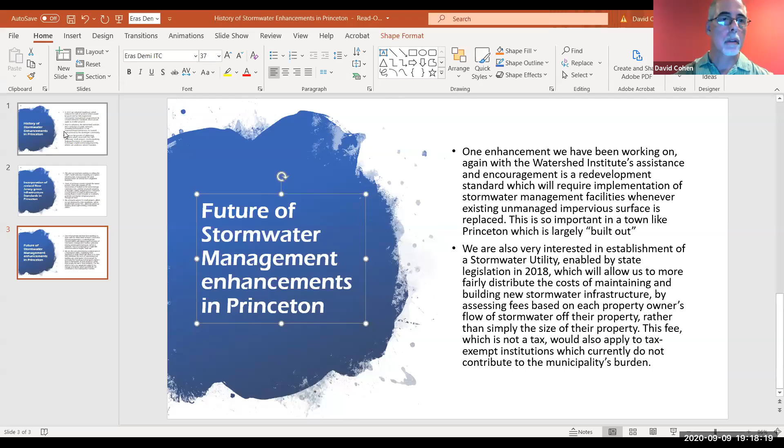Before I start going through the specifics of what we've done, I want to make a pitch for any municipal officials who are on the webinar, and just say that this is not a selfless gesture to just help the state and help our water bodies. It's also something that really has a local benefit. And I think Mike, when we were preparing for this presentation, mentioned to me that some local officials are concerned

that local residents will object strenuously to the enhancements that the Watershed Institute is recommending. But we're really finding, not only are we able to promote the better stormwater regulations on the basis of environmental considerations, and we do have a climate action plan that was just adopted in Princeton in the last year or so, which focuses a lot on some of these issues, but also it really is a benefit from the standpoint of emergency preparedness and emergency management.

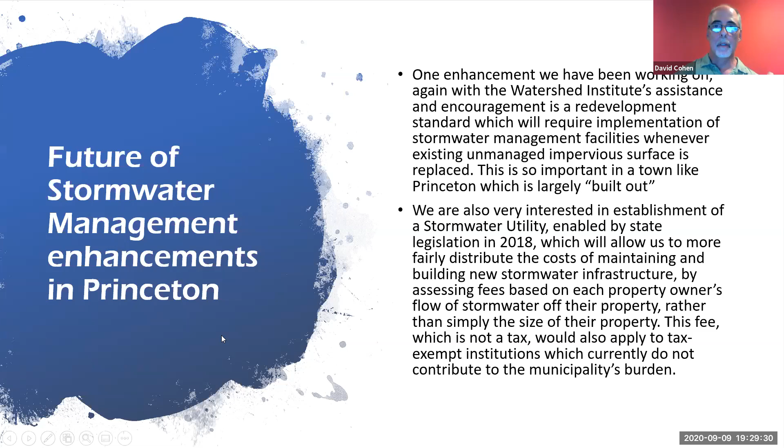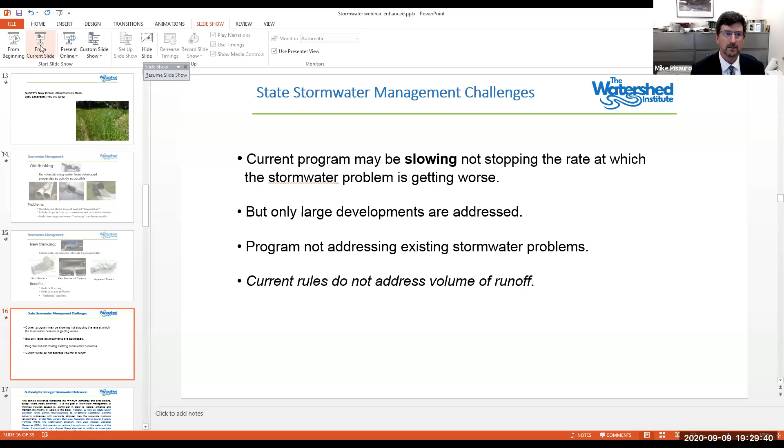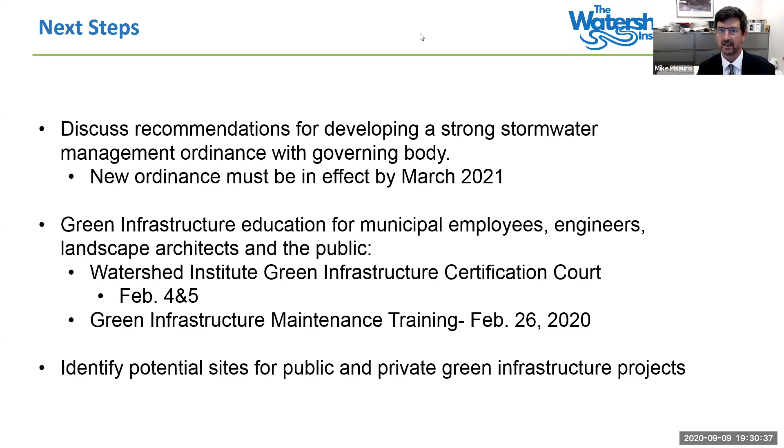Just a couple more. So we're going to talk about questions and answers in a few seconds. But as mentioned, municipalities have to have an effective ordinance by March of 2021. There's a lot of education abilities. We have some of that here. The Watershed Institute, I don't know Jen if you want to chime in, and Jack is more than happy to do some educational presentations to council ECs. One of the reasons we're doing this as a webinar is to get the word out a little larger. We've given this presentation or something similar to about 12 or 15 of our municipalities, but there's a lot more.

Hopefully people can answer it. So I'll take the first one.

Is the mitigation fee an annual fee? No, that would be a one-time fee for minor developments. As David sort of clarified, there are mechanisms in major development to waive requirements. There has to be a mitigation project, and that mitigation project has to actually occur before or at the same time as your development is going forward, and the town has to have a mitigation plan or mitigation criteria. So the waiver fee I was mentioning, mitigation, is for minor developments going forward.

Let's see, there were just some basic questions. If you could define the 95th percentile storm, and then why is TSS removal so important?

Sure, I'll handle that. I think what Mike meant by the 95th percentile storm is the storm depth which, and this varies across the state - I don't have the exact number on the tip of my tongue, Mike and I were just talking about this before - at which capture of that storm, and every storm smaller than that, and that portion of all storms larger than that, would constitute 95% of the annual precipitation. So the reality is when it rains in New Jersey, it usually doesn't rain that much. A lot of the rainfall that happens occurs in relatively small precipitation events. A day like today, we just got a little bit of rain. Those smaller storms constitute the vast majority of the annual rainfall. So even designing relatively small green infrastructure approaches, if you're capturing that first half inch up to 1.25 inches - that's our water quality design storm - you're going to be capturing the vast majority of the annual rainfall by volume.